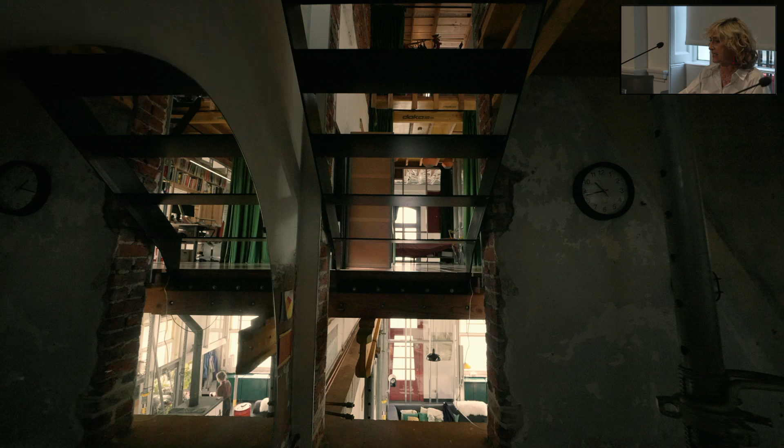And it creates a very interesting aesthetic. There is no embellishment here—there's a contrast between these new elements in the house and the passing of time. They leave things as they are; if they work and function, they don't modify them.

The architects and the inhabitants of the house have become very good friends, which is not something that always happens between architects and clients. It's an ongoing relationship, which speaks to the success of this project.

So, of course, there's some little embellishment in parts of the house. So this is our second project.

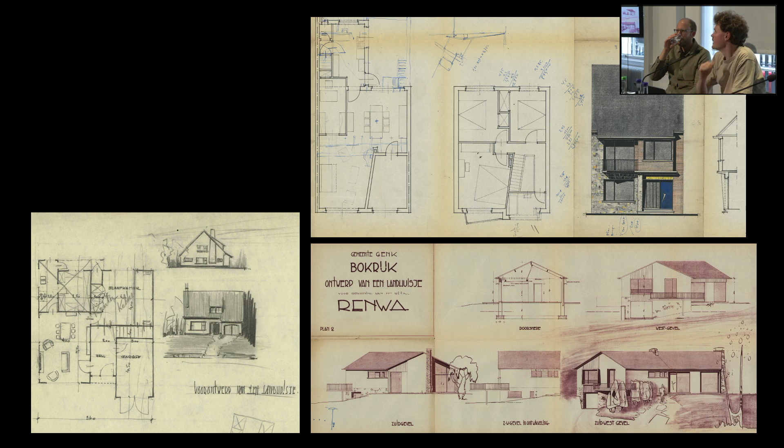But the main methodology behind the book is oral history. It's speaking with him and with a lot of his commissioners to sort of paste together the story. One of the first things that we learned is that, in fact, he's not an architect.

He dropped out of architecture school because he thought it too boring, and also the first 10 years of his production consisted of this sort of architecture - quite, in a sense, banal or anonymous detached houses for the subdivisions.

Second thing that we learned is that the architecture he started developing afterwards has nothing to do with being ecological. It's just sort of an antidote for this kind of architecture. He got so bored of himself after producing these kinds of houses for 10 years, and also developed a kind of unease with this sort of aesthetic, that he wanted to do something radically different. And for him, working with second-hand materials was just the right way to do so.

Then another thing that we learned quite quickly is that he is in fact not as unknown as we thought. There have been more than 100 newspaper articles written about him, but all in the popular press. In the architectural press, he's absent.

We found just these 3 pictures in one book from 1971 - one architecture book from 1971, and no text. So the author of this book, and it's not just any author, it's the main architecture critic in Belgium at the time, seemingly struggled to find words to describe what this architecture is about.

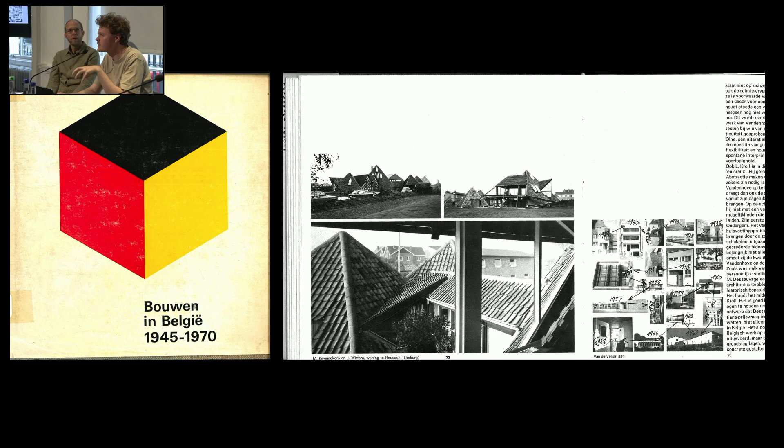I have to say it's not sort of a neutral monograph. This is really Rotor looks at the work of Marcel Raymaekers, and the themes that we describe in the book are very much themes that are present in what we do as well.

So we started obviously documenting as much of what he did. We visited 35 houses, and half of the book consists of these kinds of building sheets with amazing pictures by our 2 photographers, Anja Hellebout and Anthony de Meyre.

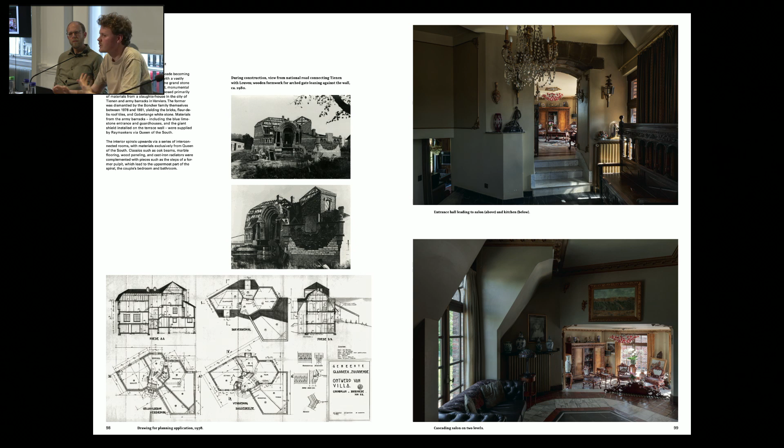And then a bit of attention, a short explanation about obviously the materials used, but also the spatial qualities of what he did, because he's very much against modernist aesthetics, but the spatial arrangement of his architecture is not unlike what other interesting modernist experiments did.

And then the heart of the book are the 4 chapters or essays that come after we show the projects. So in the first one, we explain the context in which this architecture has been possible. This map is quite central to the whole of the book, so it explains all the sites that were important for Raymaekers for his work - geological and geographical throughout his entire oeuvre.

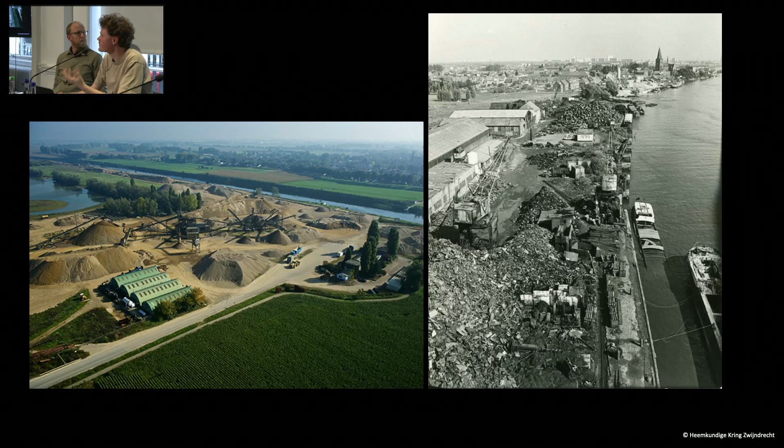And on the left, you see an extraction site along the river Meuse, I think it's the biggest river that runs through Belgium, where they extract sand and gravel for the production of concrete. So, these are 2 examples of what Raymaekers did with the materials.

So what you see at the right is reclaimed ship steel that he then hammered with an artist friend to clad this doctor's office. And what you see on the left are the leftovers of the extraction of gravel and sand.

So they are called Meuse boulders. They are, together with the gravel and the sand, equally transported and deposited by the river, but they are way too big for the concrete industry to do anything with.

And the sculpture on the left became the fireplace of the house that was built around it afterwards. But what strikes most people is all of the building antiques present in his work, and from the 70s onwards that's what he started focusing on mostly.

Not entirely a coincidence, because Belgium saw quite ruthless demolition campaigns in the 60s, 70s, and 80s. Belgium got out of the Second World War quite okay, but according to the politicians, mostly liberal politicians active at the time, they wanted to create room to modernize Belgium. There was this fear that Belgium, being a small country, was not going to be able to keep up with the bigger countries around.

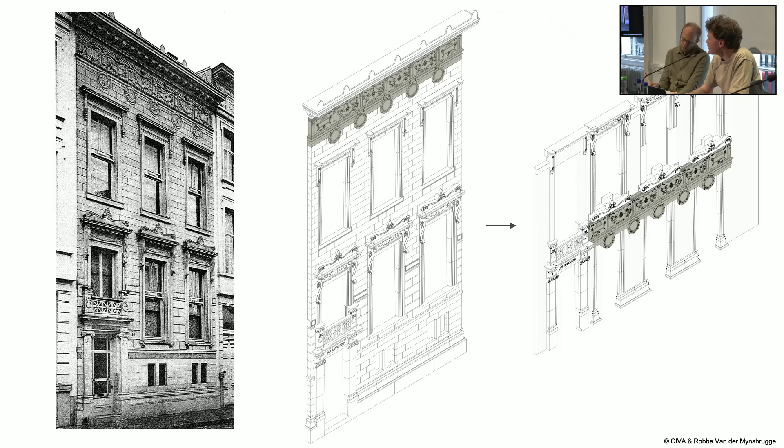A small example to illustrate this: this is the facade of a flower shop. The natural stone elements come from this facade - an Art Nouveau house that had to be demolished to make place for the parking lot of a hospital.

What Raymaekers does is reuse all of the natural stone elements and completely reshuffle them, going from a 3-story, 3-bay house to a 2-story, 4-bay house.

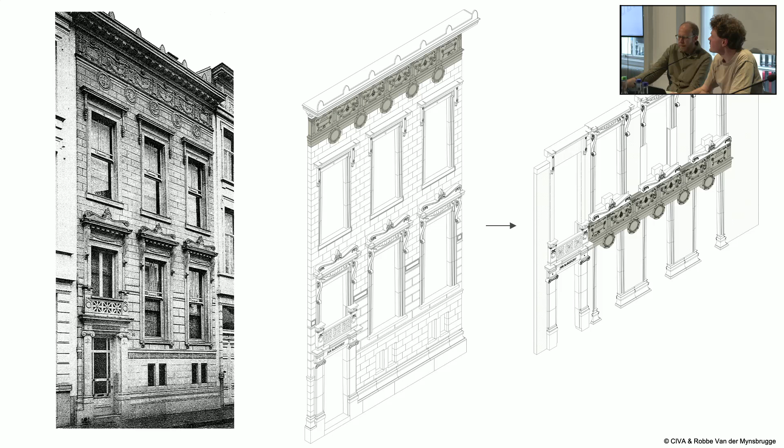Also typical for him, he thought the entablature of the original house were the most beautiful elements, so he brings them almost to eye level, so that people can appreciate them better.

The final chapter discusses how his buildings got built concretely. What's interesting about Raymaekers is he's been active from 1950-60 to 2014, and this completely coincides with the coming into existence and extension of the welfare state in Belgium. What typically happens in all welfare states is a rise of wages and a transformation from an economy based on blue-collar work to white-collar work.

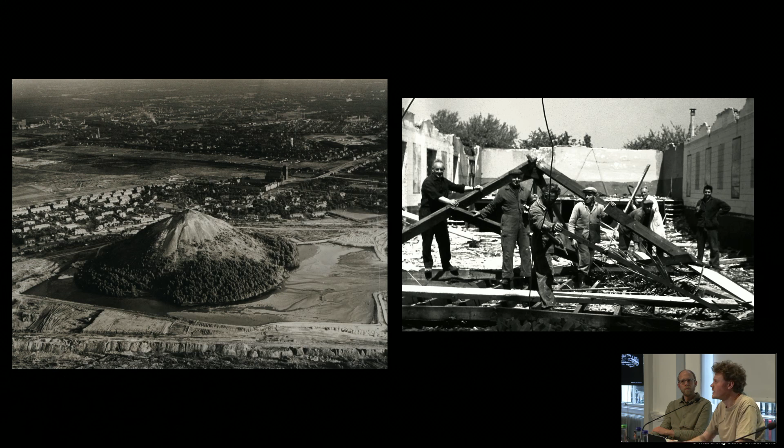Throughout his career, the cost of labor became an issue he had to deal with consistently, and one way he addressed this was by mobilizing his clients as DIYers. These are pictures of a family that dismantled a former slaughterhouse themselves as a source of bricks and roof tiles for their own house. These are pictures of another family that did the same with another building and then proceeded to construct their own house with these materials. That's a process that lasted them more than 10 years.

But these kinds of projects are also quite present in his oeuvre. This has been built for a very rich client, and he had quite a lot of them, rich clients. There is obviously the implied labor of this kind of architecture, on top of the fact that all the building antiques are so prominently present, which has attracted this kind of clientele for Raymaekers. It's easy to make fun of, but if we achieved with our book that people at least understand where this comes from, then we're quite happy.

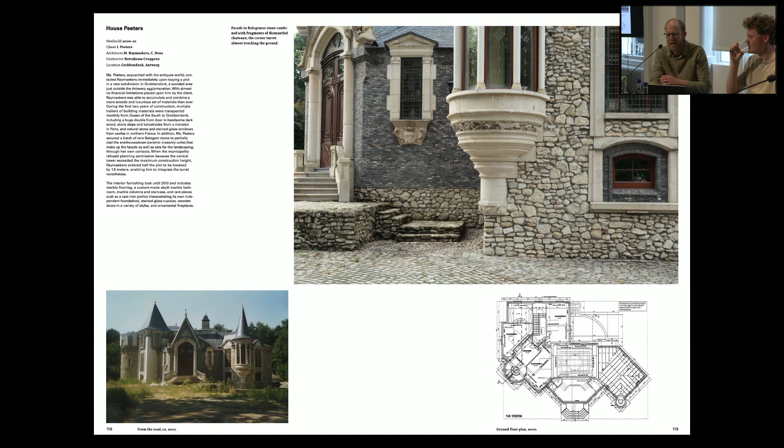Thanks, Arne. I'll just add a little coda to what Arne has talked about, and in doing so I tried to make a connection to an aspect of the situation in the UK right now. So as an outsider, my access point to Belgian residential architecture was a website or feed that you're probably familiar with, Ugly Belgian Houses.

It documents the idiosyncratic forms of expression you get in rural and suburban Belgium. It's funny, but it's also definitely a guilty pleasure, because it's clearly an elitist urbanite's perspective on what apparently is going wrong when you give people the keys to design and take control over the construction of their own house. So there's a huge snobbishness in it, and of the aggregator, but I do still find it funny, of course.

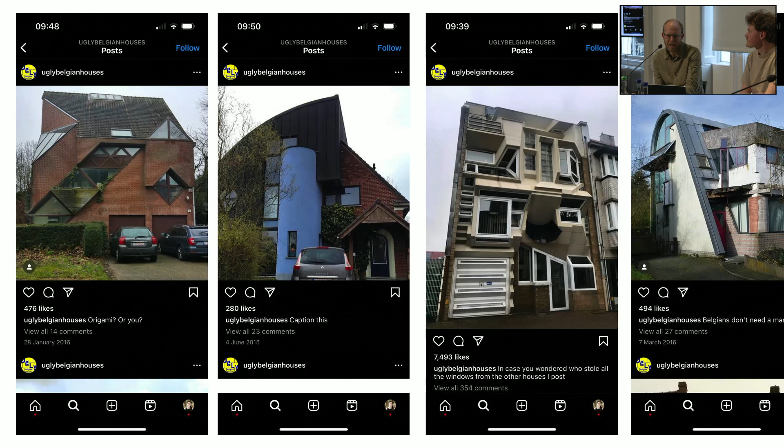The aggregator of the website says it's a snapshot of the chaos called Belgium, but certain typologies and styles do become obvious as you scroll through: turrets and towers, suburban deconstructivism, windowlessness, and the castle typology. And then, surprise surprise, Marcel Raymaekers also shows up on Ugly Belgian Houses.

But the point is that this obsession with so-called ugliness is a trivialization of something much more important and historically rooted that's able to happen in Belgium that isn't happening in the UK, and it's a real problem. There's clearly a culture of not exactly self-building, but at least taking real ownership and pride over directing the design of your house and working closely with a contractor to realize a vision that's personal. That's something very difficult to do in the UK, only accessible to a privileged few.

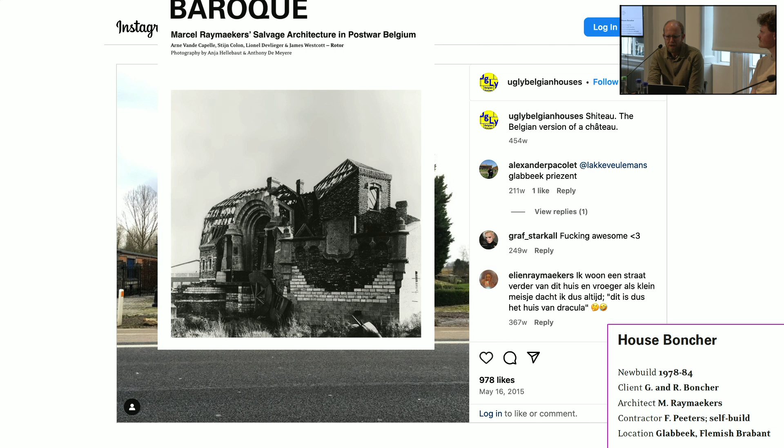So yeah, this ugly Belgian house became the cover of our book. And it's related to this kind of 70-year culture, at least it was enshrined in legislation after the Second World War - the De Taeye law. He was the politician that brought in these laws that incentivized and subsidized people to buy their own plot of land, buy the materials, work with a designer, and realize something that was individual to them. Whereas in the UK and much of the rest of Western Europe, that process was left to developers and to the state to build things en masse.

So yeah, historically, Belgium has this culture of self-reliance when it comes to building. And as much as we might laugh at some of the results, it's much more important to suspend questions of taste and realize the value of what's being expressed here.

So for me, that was an important connection. And then pivoting to the situation in the UK, where it's very difficult or almost impossible to realize for yourself a house in the countryside.

The only way you can do it is through the National Planning Policy Framework, which sets a very high bar. It has to be exceptional, it has to contribute to the rural economy, it has to be extremely sustainable—all very difficult conditions to meet, which by definition exclude most people.

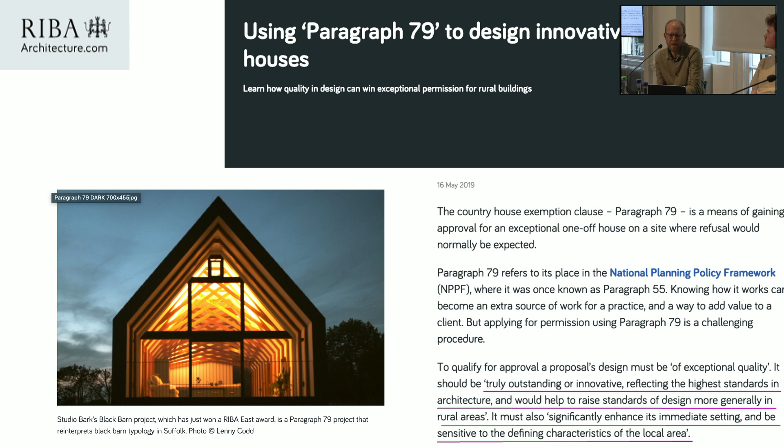RIBA offers some advice to do it, so they're called paragraph 79 houses. Certain boutique architecture offices make a living by facilitating wealthy clients to build their paragraph 79 homes, which look like elite boutique versions of ugly Belgian houses, you have to say.

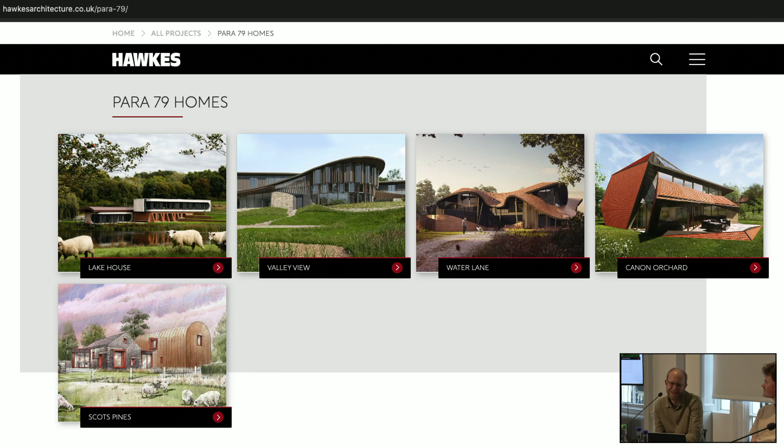So yeah, questions of taste are obviously difficult and flexible and should maybe be suspended. That's why in the unit we teach at the AA, Diploma 18, Arne has been a central part of it as well.

This year we decided to look not at paragraph 79 houses, which are obviously the exception—they're a tiny sliver of what is actually being built. What is being built is houses like these. We call them rural housing developments, for lack of any other name.

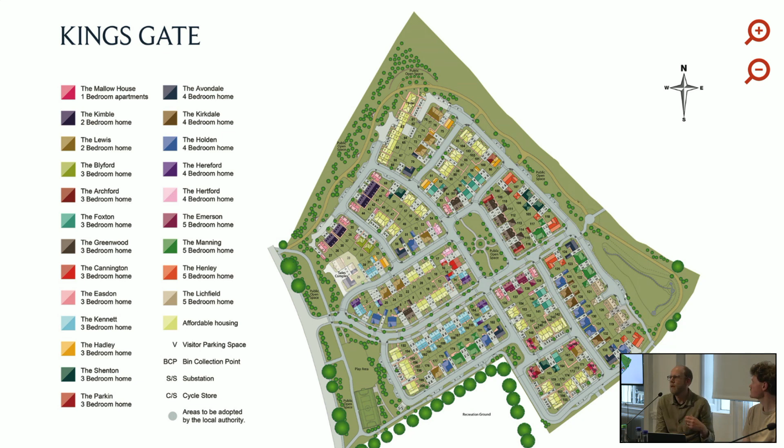So they're being bolted onto villages and towns in the countryside throughout the UK at the moment. This is by far the mass of house building that's happening. They come with traditional names, huge footprints, and a narrow range of houses that people can choose from, and they're often built on greenbelt areas.

This one is just outside of Oxford. This is the developer's pattern book. All the options come with very stately, reassuring, profound, solid-sounding names.

One of the students in our unit, Anushka Ladani, chose to take a generous attitude towards it and figure out connections with the arts and crafts movement, at least features of that movement they were trying to reference. But of course, when it's done en masse by a volume house builder, it becomes not decentralized or individualistic like the arts and crafts movement was trying to achieve, but the complete opposite.

The students were brave enough to go out into the field and try to take them seriously as well, and understand what people valued—or is it a question that these are a kind of last resort, with no alternative but to live in these suburban situations.

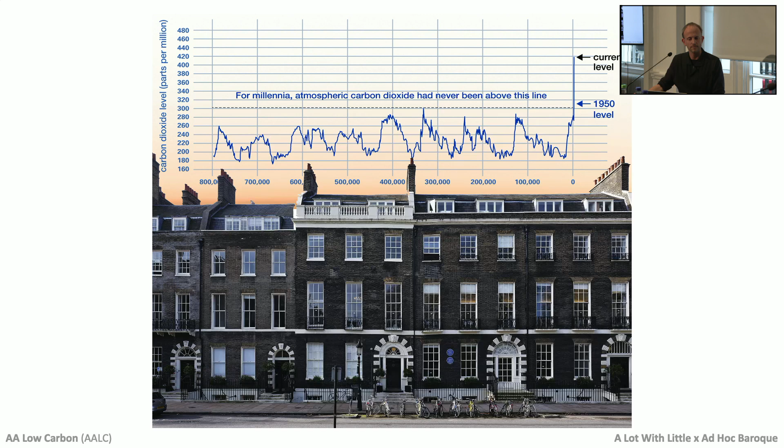So we carried out quite a detailed carbon footprinting exercise that we started a couple of years ago, and it took us about a year to understand all of the aspects of the AA: its buildings, its courses, its people, its activities. We did that by looking at the spending records of everything the AA buys, but also with interviews with staff and students, in order to understand the complete, or as they call it, system-complete picture of the carbon footprint of the school.

We were supported by the school and by carbon expert Mike Berners-Lee and the building physics company Greengage. That concluded with, well, we added up a lot of little numbers, and surprise, surprise, we ended up with a big number: 9,161 tons of CO2e, meaning carbon dioxide and equivalent greenhouse gases, that the AA in all of its activities emits per year.

Now, those kinds of numbers are hard to imagine, so if you want a different way of visualizing that, you could put 989 cars parked in Bedford Square, put the engines on, and let them idle there, and they would continue to emit carbon emissions at the same rate that the school does.

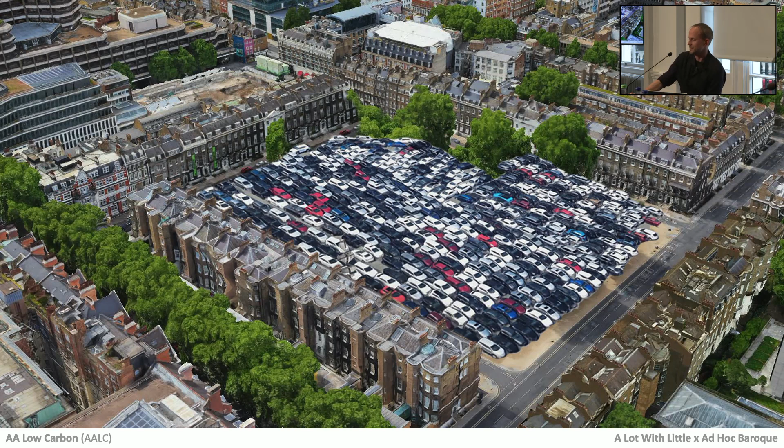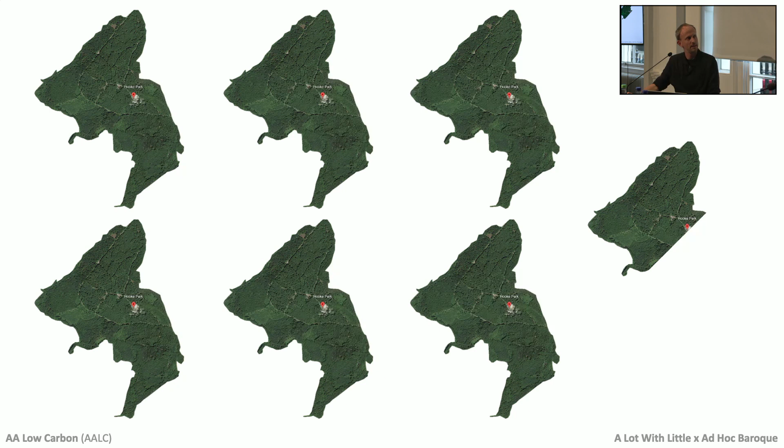Or if you prefer a more positive spin on it, you could compare it to Hook Park, the AA's woodland campus. If we had 6.5 Hook Parks, we'd have 900 hectares of woodland, and those trees would be sequestering carbon from the atmosphere at the same rate.

So all of this information is in a website, which I'll give you a link to, and hopefully some of you have already seen it. It contains quite a fine-grained breakdown of all of the emissions of the school, and you'll see clear patterns. Travel emerges as the biggest factor by far, then the energy and emissions associated with the building itself, electricity and gas use, and then our digital activities, administration, and materials.

The second purpose of our work, now that we understand the emissions of the school, is to start to gather ideas to promote and implement changes at the school that can bring down that carbon footprint. But not just to bring it down, also to improve the quality of the education here at the school, particularly the levels of climate literacy and the kind of discussions we're able to have about the climate and our relationship to it through our architecture.

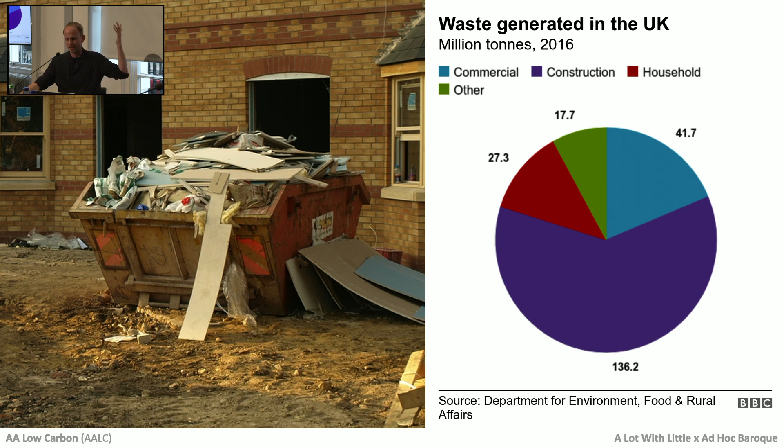I think it's a little unfortunate that we talk about building waste and picture stuff, materials, bits of plasterboard going into the ground. Not that that's not important, but I think we equally need to see that the same kind of linear thinking results in us dumping carbon dioxide and greenhouse gases into the air, into the sky. So perhaps it's a bit clunky, but when you think of a landfill site, we should also be thinking of skyfill sites - the fact that we're continuously dumping things we don't need into the atmosphere, as well as into the ground.

So in being asked to introduce the AA Low Carbon Project and connect it to the work of the two exhibitions, I had an opportunity to wonder what some of the approaches of our dear Marcel Raymaekers, who I've come to love after reading much of the book, and indeed many of the other architects in the A Lot with Little exhibition, would make of the AA's future and our practices in relationship to carbon emissions. Well, forgive me, because I couldn't help but enjoy the radical reuse aspects that Marcel inspired.

So let's imagine a future scenario in which the conservation lobbies and the forces of the climate crisis have in fact formed some kind of truce, and maybe even an alignment that allows radical retrofit of buildings to take off across London, even across the UK. What a future that could be.

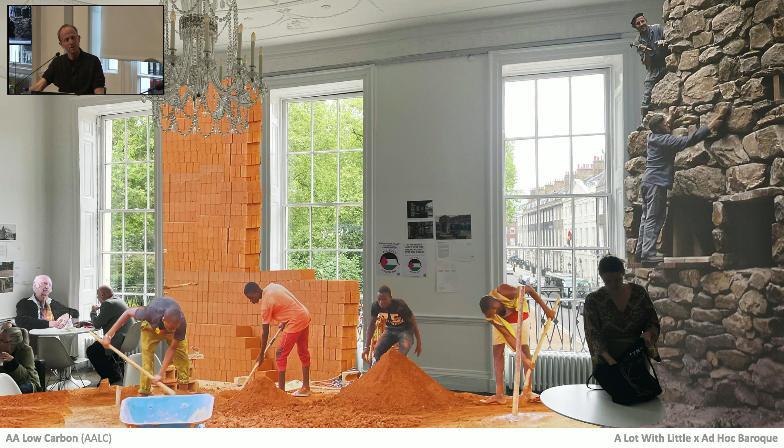And how much would be at stake if the AA could be at the vanguard of this kind of transformation? This is an architectural school with a global audience. This is a Grade 1 listed building in the centre of London. Everyone would be watching. And if we can solve the kind of conservation and climate needs, then anyone could follow that lead. And it could happen from a top-down, large project approach, or bottom-up, or both, through the work of students and tutors engaging with the fabric of our buildings.

We could be building new thermal linings to our cold, leaky rooms. We could be experimenting with new materials and making ourselves. And we're going to need a very different approach to ways of engaging and sourcing our materials.

I imagine a future with a kind of general store, a bringing together of the workshops and other parts of the school that procure materials, so that we can actually have a single source that is really looking for the highest quality, lowest carbon materials for students, and then, of course, could equally be open to the general public.

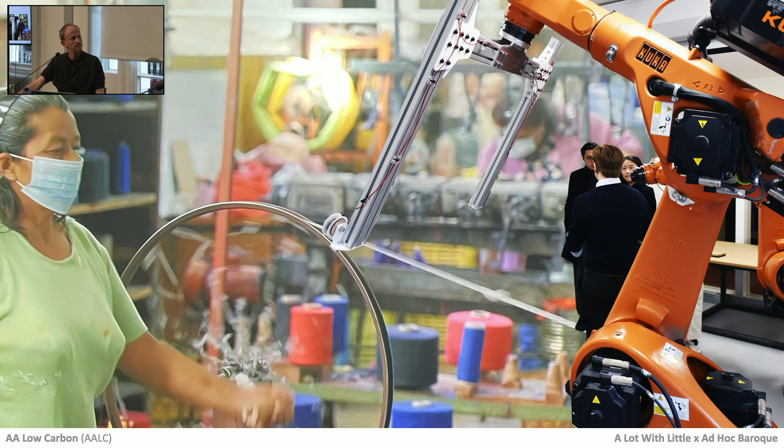And we need circularity happening in the school itself. I imagine, as 3D printed models are no longer in use, they could be reprocessed on site into new feedstock, and that we can then use for digital fabrication.

We might close the loops of circularity in our own building, in our own processes of making. And I think that idea, a kind of concept of taking things in-house, which relates to the DIY mentality, is an opportunity to gain control over things that are otherwise out of our control, and we're not really aware, or it becomes hard to track down, or even deliberately obfuscated as to what their climate impacts actually are.

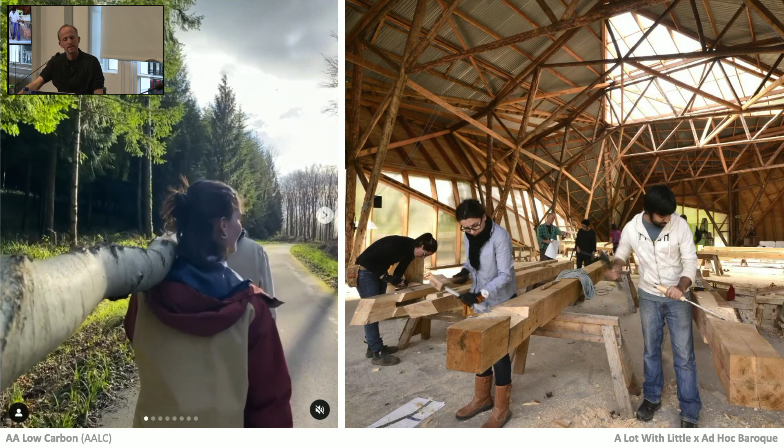And we imagine the rapid growth of activities that are already taking place at the AA, such as here collecting wood from Hook Park, or it could be clay, and the rapid development of our knowledge and skills of working with biogenic construction materials.

But if we're going to get there, we're really going to need to engage with the cold, hard numbers of the climate crisis and not be paralyzed or dismissive of them, but respond with creativity, joy, innovation, and collective action. After all, this is a once in 800,000 year opportunity. Thank you.

Okay, thanks so much. Really, in a way, very different presentations, but I think all kind of also very entertaining and with a lot of commonalities. And maybe we can explore some of those and the differences. I'm going to start with a couple of questions. And if you have questions for each other, that would be great. And then we'll open to the floor.

So what strikes me as really important to all the presentations is the role of imagination, which I think Tommy really emphasized towards the end, but also the importance of narrative, right? And you've got this amazing book which really centers Raymaekers as a personality, the biography of this individual. And Noemi's films really interestingly have the architects talking to their projects, and it's a methodology and a whole career that is behind these projects.